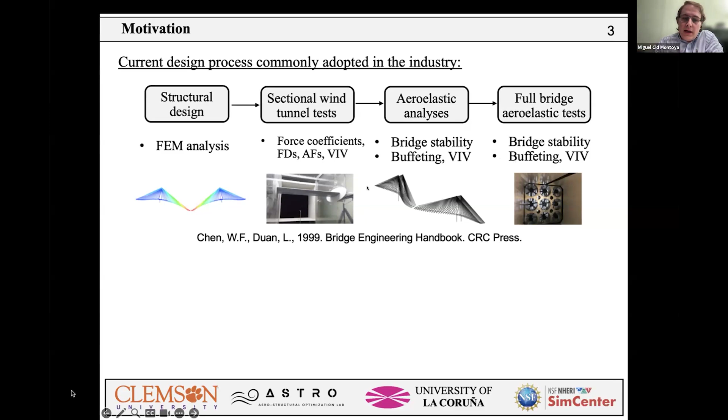The problem with this is that if they want to iterate and optimize the process, it's kind of complicated because we have two different teams. We are relying on experimental approaches, and consequently the chances to iterate are complicated.

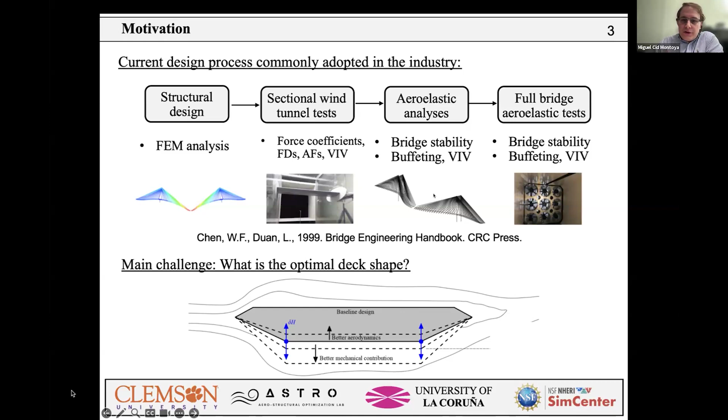And there is one main challenge here. What is the optimal deck shape? How can we optimize the cross section so we can reduce the cost, the use of material, and also increase the safety and resilience of the structure? So in order to answer that question, me and my collaborators have been working on developing frameworks to address this question, by taking advantage of CFD simulations.

But in order to do this, first we need to develop a parameterized finite element model. So every time we change the geometry of the bridge, we see how that affects the natural frequencies, mode shapes, and so on. We need to define the wind modeling, which is, of course, given by the location of the bridge. What are the design variables that we are going to be modifying along the design process?

That may include the definition of the towers, the cable supporting system, the cross-section, and everything that we want to modify. And also, in order to see how shape modifications affect the bridge aerodynamics, we need an aerodynamic surrogate model that provides us with all the aerodynamic information we need to carry out the analysis, right?

So let's say that we are going to look at the buffeting analysis. In that case, we will need flutter derivatives, admittance functions, and so on. And if we use the quasi-steady assumptions, we can just go ahead and do the optimization with an aerodynamic surrogate model that is trained with force coefficients and the slopes.

But this has some limitations. For instance, here in this figure, we see the cross-section of the Great Belt Bridge, which is considered a streamlined cross-section in which the quasi-steady theory more or less behaves properly. We can see that the flutter derivatives as a function of the reduced velocity, plotted using the Polytechnic of Milan formulation, are more or less horizontal, meaning that they are not very sensitive to the effect of the frequency.

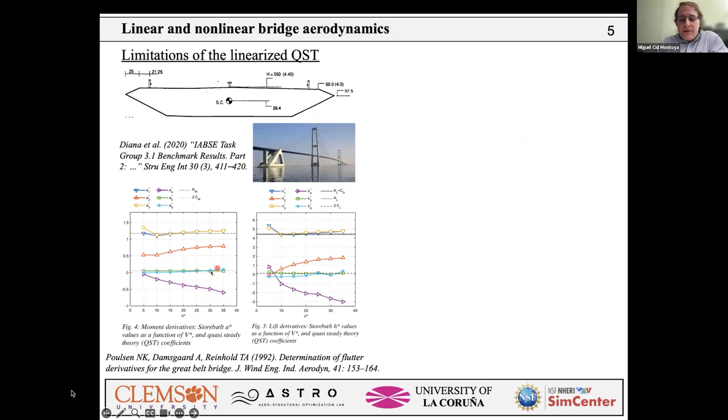However, if we move to more advanced geometry, such as the design of the Messina Bridge, we can see that even though at high reduced velocities they asymptotically tend to the quasi-steady state, and here we can see that these lines are more or less horizontal, at low reduced velocity we have a number of nonlinearities, right? So the quasi-steady formulation is not going to work for this range of reduced velocities.

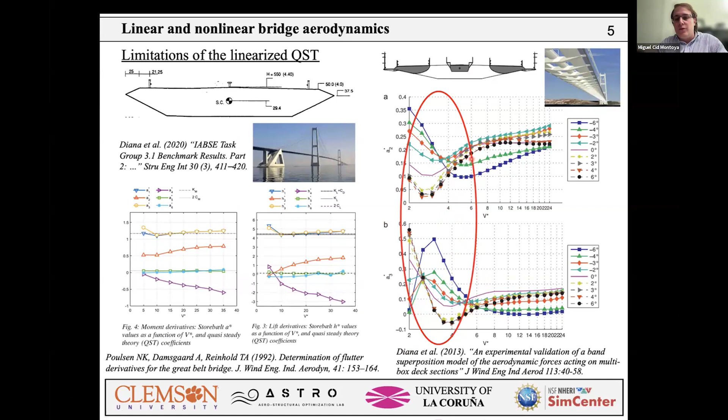This means that adopting the quasi-steady theory has some limitations, and we need to advance the CFD simulations and emulation strategies to carry out the design of the bridge using this approach.

In all the aerostructural optimizations we carried out, we saw that the main trend the design follows is to increase the depth of the deck. This is because, particularly when we have a box deck cross-section, increasing the depth improves the mechanical properties: torsional stiffness, bending stiffness, and others. The torsional stiffness is especially positive for improving aeroelastic responses, flutter response, and buffeting response.

But as we increase the depth, we increase the bluffness. For streamlined geometries, the quasi-steady formulation works well, giving a good estimation of the response. But as we increase the depth, we move to bluff geometries where the quasi-steady theory doesn't work. That's another reason for getting rid of the quasi-steady theory approximations.

The original aerodynamic surrogate model, based on force coefficients, standard slope, and the quasi-steady theory, works like this: we have a baseline geometry, we define the design variables we're going to modify, we define a sampling plan based on those variations, and we carry out CFD simulations where we are not moving the deck. We call this static, because the deck is not moving. We build the surrogate, and then use the quasi-steady theory to estimate the flutter derivatives.

By doing that, we can carry out the optimization. If the design is streamlined, the quasi-steady theory works well and we get accurate results. But if it's not, we get bad accuracy.

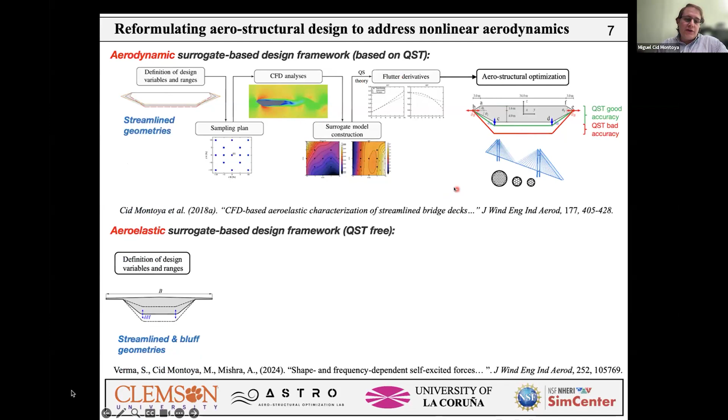So we've advanced this by using dynamic CFD simulations instead of only static ones. We are doing forced vibration, extracting the dependency of the fluid structure interaction parameters with the reduced velocity, so now we are considering both streamlined and bluff geometries. In our sampling plan we have the deck shape, but also aeroelastic parameters such as the reduced velocity, and a new word we are working with, the angle of attack.

Our simulations are no longer static, they are dynamic. We are reproducing the forced vibration typically conducted in wind tunnel tests, and by doing that we can create an aeroelastic emulator that captures the nonlinearities. So if we need to carry out the design and deal with bluff geometries, as long as the CFD simulations are accurate, we are able to reproduce the bridge response.

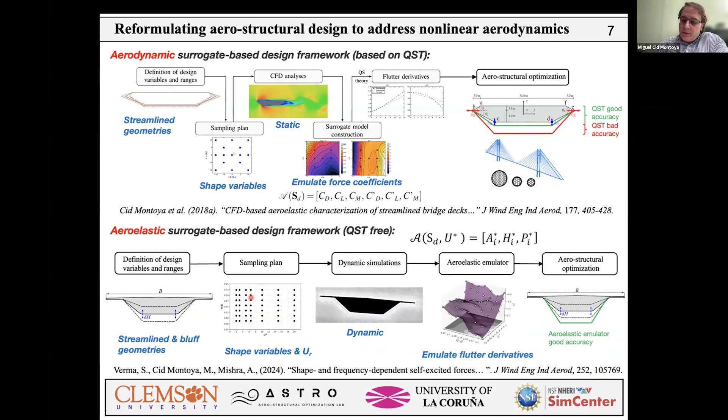We've applied this to the cross-section of the Sunshine Skyway Bridge as a representative single box deck geometry, because there is a lot of research on this cross-section in the literature. The first studies were conducted at Western University, but then several universities in Italy carried out numerical and experimental investigations to study the effects of geometrical parameters, such as the level of roundness of the corners. Thanks to that rich literature, we can use those results to validate our CFD simulations.

We use this baseline geometry, which is the actual geometry of the bridge. The actual geometry has sharp corners here, but we are considering the rounded configuration because it has more results in the literature. We modify the depth by increasing and decreasing this vertical distance, giving us a representation of a design domain with a strong impact on the mechanical properties, but also on the aerodynamic responses of the bridge.

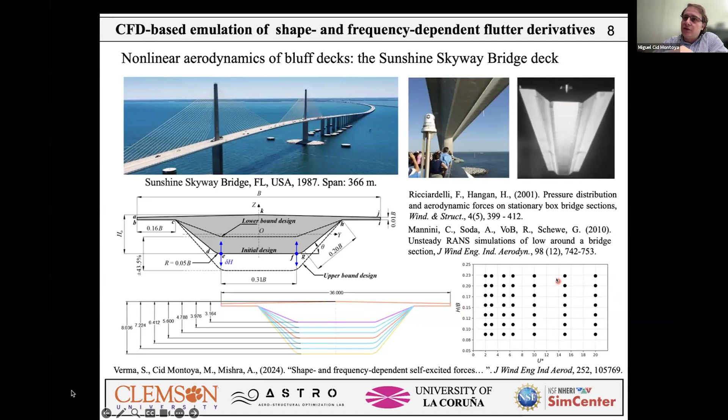This is the sampling plan we carry out, and these are the geometries we are considering. This is H, the depth, this is B, the width, and this is the reduced velocity we are analyzing. We have a higher density of samples in the lower range of reduced velocities to capture nonlinearities, and a lower density where we consider the tendency converges asymptotically to the quasi-steady state.

In terms of the simulations, we impose a forced vibration. We carry out forced vibration in three degrees of freedom to extract the 18 flutter derivatives. We obtain the flow fields, extract the pressure distributions, then extract the self-excited forces time series, and from there obtain the flutter derivatives.

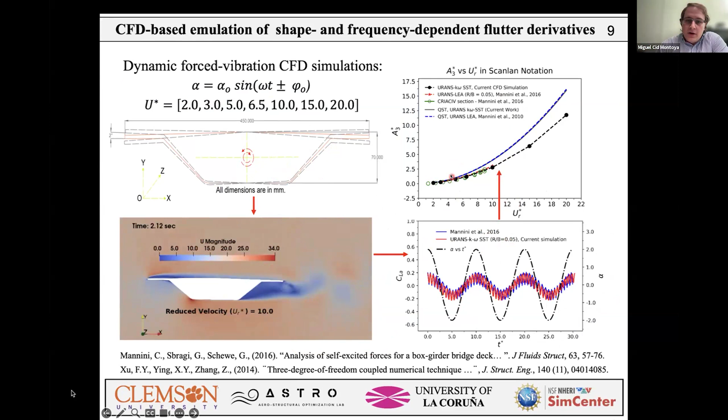Before that, here is a description of the mesh. In this case, we took care to have a lot of density in the wake, because this is a bluff geometry. The mesh was generated by a Python code that is fully parameterized, so every time we modify the shape, it adapts and produces a new mesh.

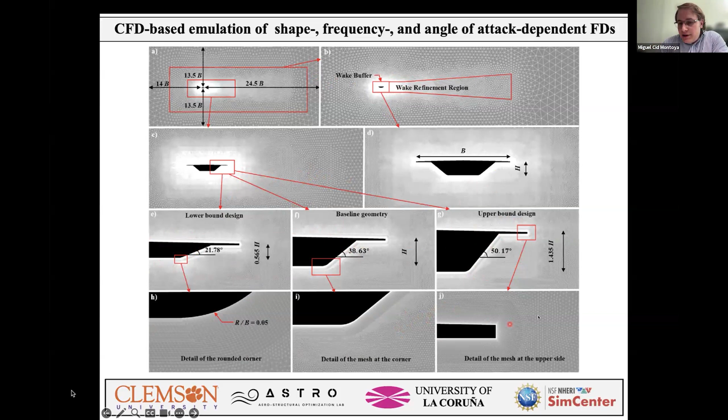Here we have examples of one of the most streamlined geometries, the baseline geometry, and the bluff geometry. We also took care to have a smooth transition from the boundary layer to the bluff regions.

With this mesh, we built several meshes, coarse, medium, and fine, considering the general distribution of cells, but also the number of elements considered along the boundary layer. We carried out verification studies in order to ascertain the independency of the spatial discretization, but also the time discretization, both for static and dynamic simulations, in order to see that our results are independent of the modeling schemes. We carry out a lot of validation studies.

Here on the top right, we see the comparison with the experiments reported by Mannini et al. 2016 that were conducted at the University of Florence. These are the flutter derivatives A2, H2, A3, H3.

Here we are comparing the results with the experimental tests conducted by them, and numerical simulations conducted by them using a different turbulence model, and the quasi-steady approximation, where we can see that results clearly diverge from those obtained by the quasi-steady formulation, which justifies the approach that we are using.

Here in this figure at the bottom, we see a comparison of the streamlines reported by Mannini 2016 with our flow fields, showing that we are basically reproducing exactly the same flow fields.

And here we have the time series in which we can see that even though there are slight variations of the intensity of the vortex shedding and the frequency, the amplitude of the response and the phase is basically the same, which is the one that controls the results in terms of flutter derivatives.

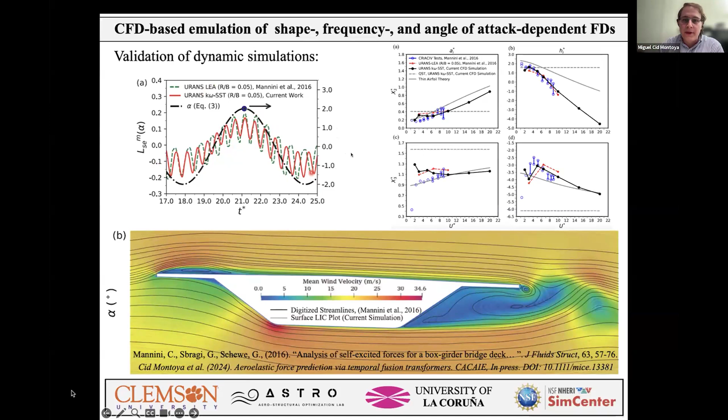Running these simulations for all the samples in the sampling plan, all the geometries considered and the frequency, we can obtain this data set of flutter derivatives.

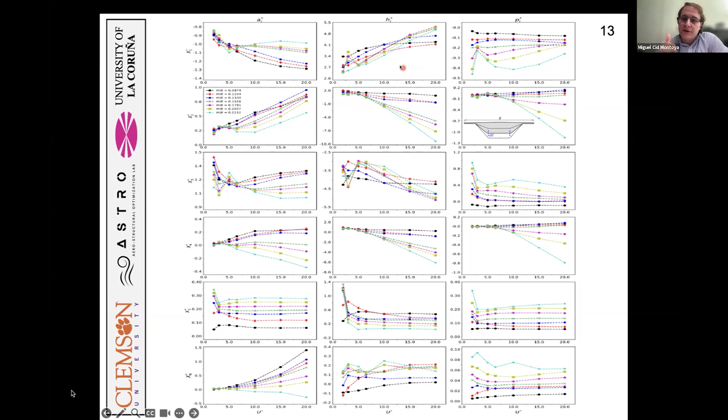We can see that when we have streamlined geometries, the most streamlined geometry is the one represented in black. These results tend to be horizontal, frequency independent, but as we increase the level of bluffness, they are more dependent on the value of the frequency, and their convergence to the asymptotic behavior is delayed to higher reduced velocities.

By using this information, we can build a surrogate model. So basically at the low reduced velocities, we have the model vibrating at high frequencies. As we increase the reduced velocity, we change the frequency, and we also modify the shape. So the simulator is supposed to reproduce all these effects during the analysis and the design process.

Here we have some surfaces of the result using the Scanlan notation, the PoliMi notation, which allow us to see the horizontal convergence to the asymptotic response. And we can see that this application case, as it is a bluff geometry, it has a lot of nonlinearities.

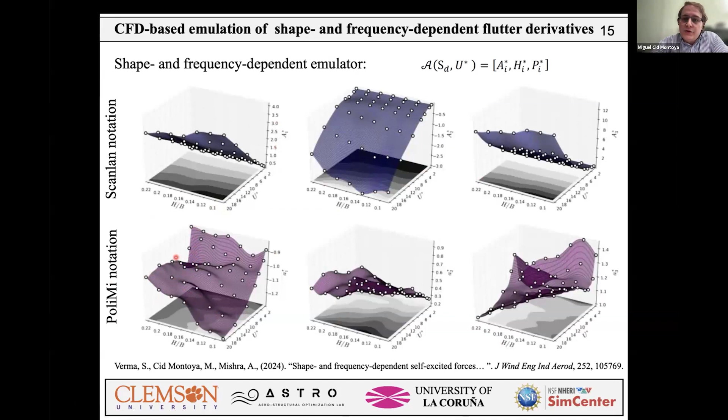And here is where it comes the question of how we should do the interpolation between the points. The thing is, if we take a look at the flutter derivatives, there are strong changes between the points that we have obtained with the CFD simulations. For instance, taking a look at the blue line here, we can see that we are capturing some nonlinearities here, but we don't know exactly what is going on between this point and that point.

So the ability of the surrogate model to reproduce that response is based on the sampling density. That means that the approximation that we use, the kind of approximation that we use, is going to condition a lot of the analysis and the design.

For instance, here, this is a graph that I took from this paper, Salvatori and Borri 2007, and they were discussing the different interpolation approaches that you can use when you have this experimental data, these black points here, and what happens if you use a linear approximation, a spline interpolation, or a rational function, another kind of approximation in the time domain. And just taking a look at what happened at different reduced velocities, we can see that the value can change by 20%. And of course, that affects the bridge response and consequently the optimum design.

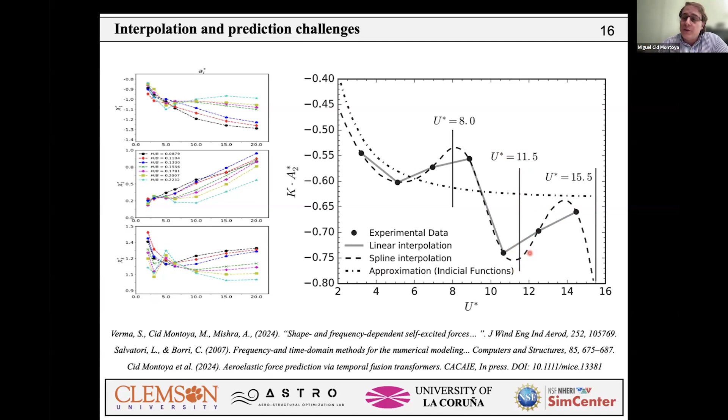So the key question, or the thing that we want to address here, is what information should we use from the CFD simulations, and how deep we can go, or what kind of rich information we can use to improve our interpolation capabilities. So the basic problem we are looking at is we have the design of a bridge.

We are focusing on the deck shape because that's what impacts the aeroelastic response of the bridge. We carry out a sampling plan, and for every design in the sampling plan, we carry out the forced vibration CFD simulations. We extract the flow fields. From the flow fields, we extract the pressure distribution.

From the pressure distributions, once we integrate those, we get the force time series, then we extract the flutter derivatives, and we obtain the bridge response.

How do we go from the design to the response to carry out a good design? Our first approach will be to build a huge surrogate in which we have as input all shape and size bridge design variables, and we get as output the aeroelastic response. But we will, of course, have dimensionality issues.

The approach I've been describing so far is to go from the sampling plan to the flutter derivatives, and we just build a basic surrogate model that reproduces the integrated fluid-structure interaction parameters. But we can go deeper: we can take a look at the force time series, and that is going to help improve the accuracy.

So for instance, in this work that we recently published, we carry out the interpolation in the time domain. The thing we were interpolating were the force time series instead of the flutter derivatives. So we do the interpolation first, and then we extract the flutter derivatives.

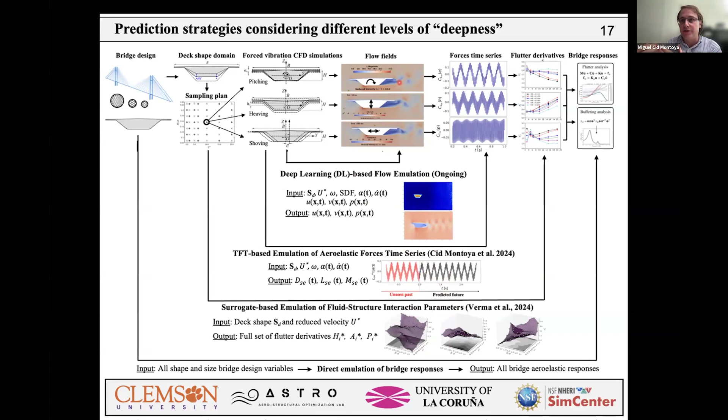But we can go even deeper. We can try to reproduce or emulate the flow, and from the flow we extract the pressure distribution, the force time series, and then the flutter derivatives.

This is the approach we use for doing the emulation of the time series, in which we use temporal fusion transformers to do that. A temporal fusion transformer is an AI technique that was recently developed in 2021.

What we do basically is carry out the CFD simulation, for example, obtain the time series, and train this model with a lot of time series to see if we can predict the time series of another geometry or reduced frequency that is not in the original sampling plan.

We did that by using the original sampling plan and removing half of the samples, which is very demanding for an AI approach that typically uses a training-test split of 70-80%.

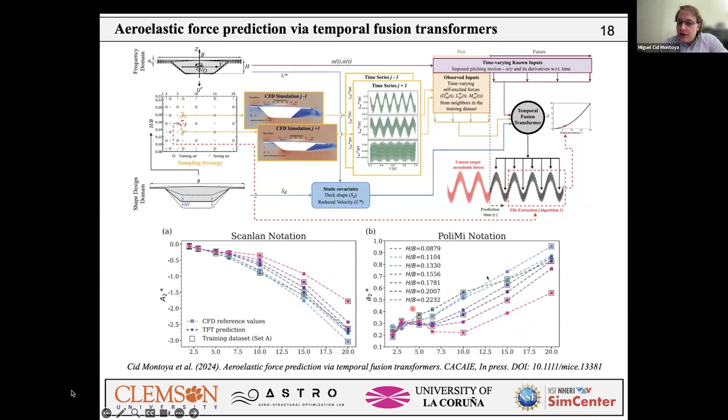We can see that the model, after training, perfectly reproduces the flutter derivatives, even the points that are not in the sampling plan. For instance, here the ones with a square were used during training of the TFT, and the ones without a square, like this point here, were predicted.

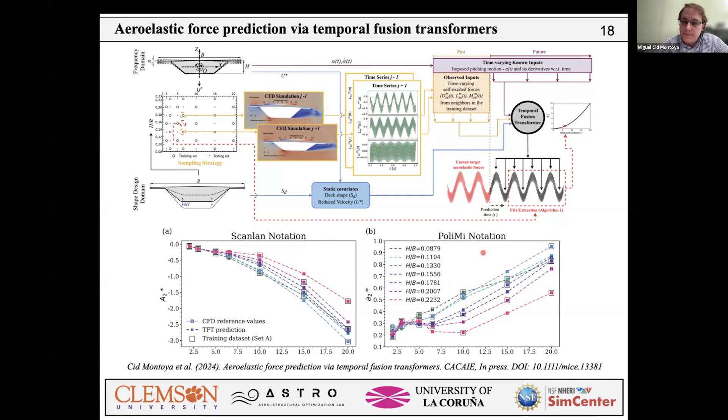Since we are doing the prediction in the time domain, the chances that it's not going to work, as can happen with a Kriging surrogate, are very reduced, and the emulation strategy is more robust. The reason I am presenting this database is because we want to get deeper and look at the flow fields to improve the prediction strategies.

So what we have in this database is the sampling plan: 6 reduced velocities, 7 geometries. Here this is the geometry where we are changing the depth - these are the 7 designs. In terms of the reduced velocity, this is the frequency of oscillation.

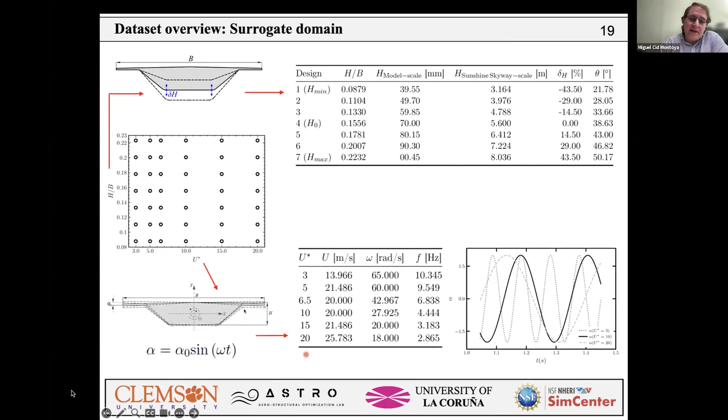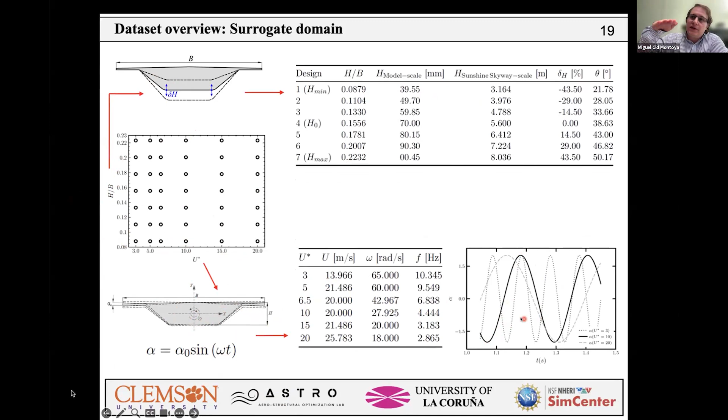We are looking only at the pitching vibration because in order to extract the flutter derivatives, we need the 3 degrees of freedom: torsional, vertical, and horizontal. We are only adding the torsional response to the database because of storage size. By changing the frequency of oscillation, we change alpha, the leading rotation of the deck.

This is the data we are collecting: first, the flutter derivatives. Then we are also collecting the forces, the time series of the forces. We are also collecting the pressure distributions along the deck, so they can be used for training AI models. And we are also collecting the fields.

Since we are talking about 7x6 simulations, the fields are about 30 terabytes, compressed about 8.7 terabytes. This other data, which is of course smaller, is in the range of 30 gigabytes, and this is basically nothing.

Here we have some images of the dataset. This is the force time series. When we keep the geometry and change the reduced frequency, this is what happens - the frequency of alpha is changing and the behavior is changing.

Here we have how it looks when we change the geometry and keep the frequency constant. We can see the frequency of oscillations is the same, but the response is changing. We can see here we don't have vortex shedding because this is similar to a flat plate, so the response is controlled by the forced oscillation. But as we increase the bluffness, the vortex shedding is what leads the response.

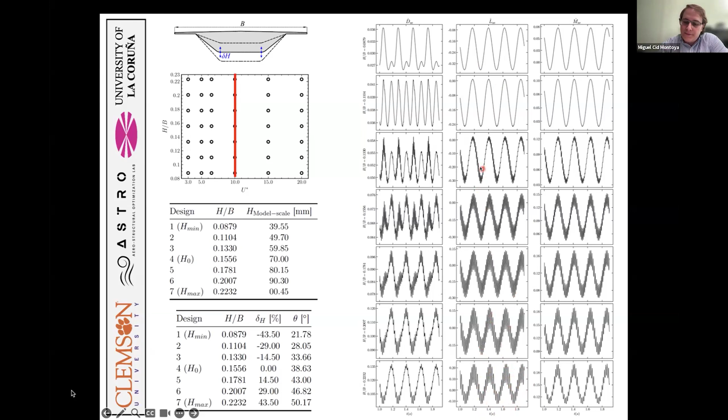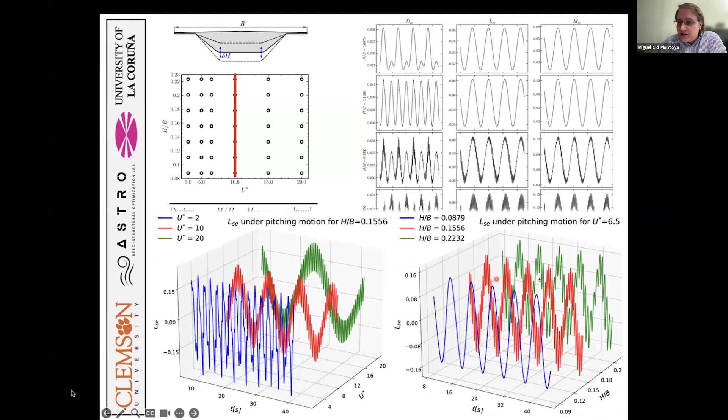If we compare this in the two planes, how changing the reduced frequency or the geometry affects things, we can see these characteristics are very clear. Moving to the pressure distributions, we have the pressure distributions for all the geometries, obtained as a function of time.

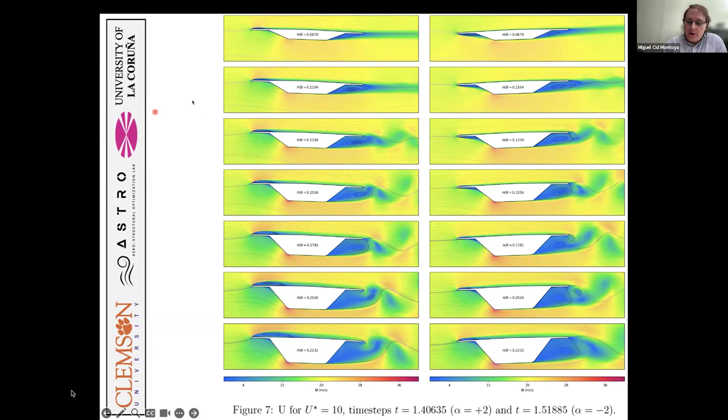We also have the flow field of the pressures all around the domain. We have the turbulence kinetic energy, which is very good for seeing the turbulence, and all these features are very clear in this figure.

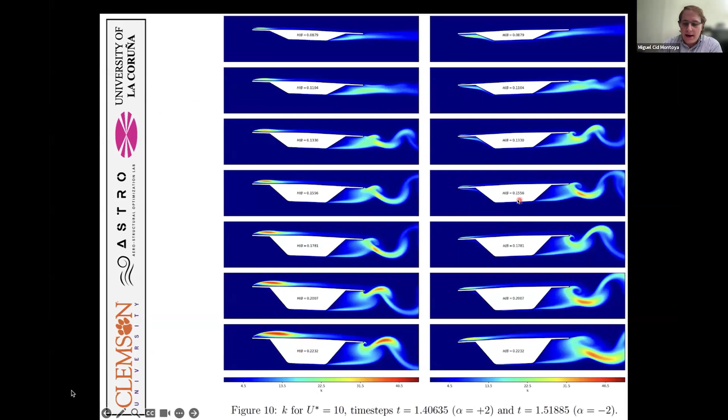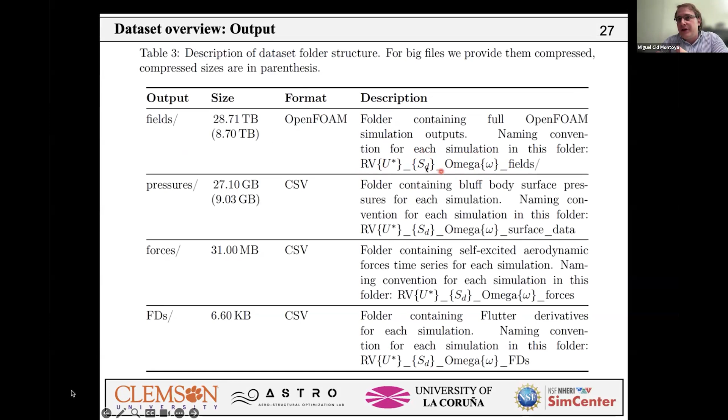That's most of the information we have in the database. So again, we have the flutter derivatives, force time series, pressures, and flow fields. The format of this data is as shown in this description. We have the reduced velocity in the name, then the shape identification, the frequency of vibration, and the name of the field. There is one file for each geometry and each pair of geometry and reduced velocity.

Inside those files, for the flutter derivatives, the format is going to be CSV. For the self-excited forces time series, we have the time and then the 3 components: drag, lift, and moment. For the pressure distribution, we have the time and the location in terms of X and Y, since it follows different points along the surface of the deck.

For the flow fields, we are using the same format used by OpenFOAM, since everybody is familiar with it. We are sharing all the output obtained using the Menter's K-omega SST turbulence model. Another important thing is that we are storing a very detailed time discretization—saving every time step at 0.000225 seconds to have rich information in time, which is critical for training the machine learning models.

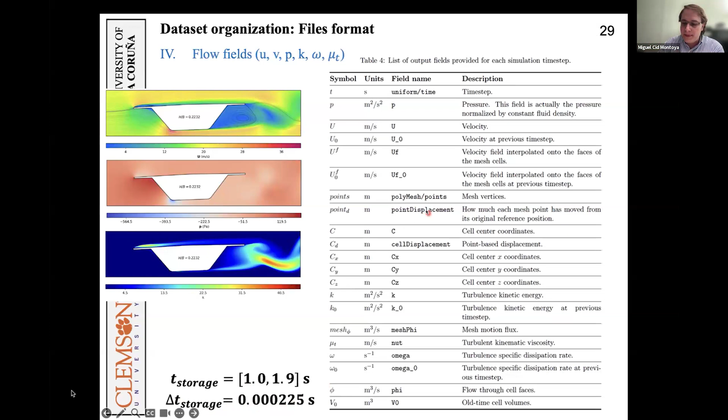So just a couple of applications, very quick.

Miguel, I'm sorry to interrupt, but you're about 4 minutes over your time slot already. Sure, okay, no problem.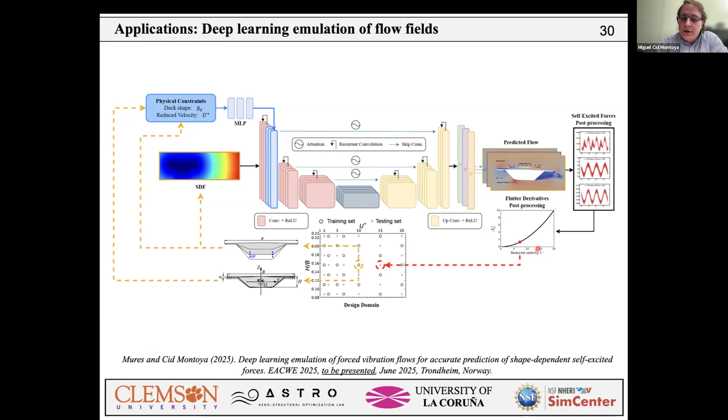So here we have a couple of applications. The basic idea is that we are going to use this for training machine learning models, and we will present in Norway in a couple of months. So I'm going to skip this.

In conclusion, depending on the modeling strategy, we need to use different CFD simulations. The goal of this work is to share this database of flow fields, pressure distribution, and so on, so the wind engineering community can develop models and advance in the wind-resistant design of bridges.

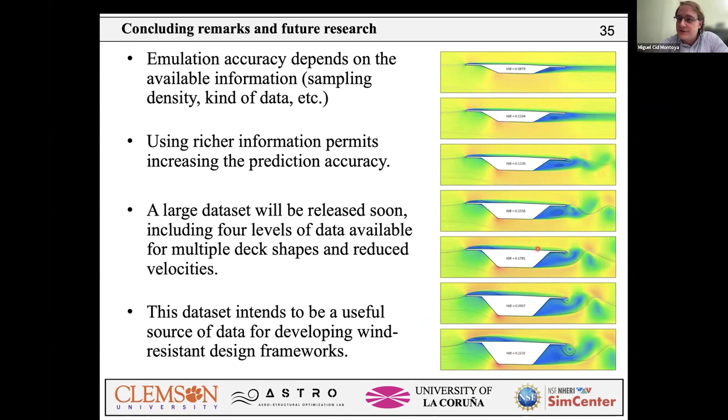Thank you so much, and sorry for the timing.

No worries. Thank you so much, Miguel. I don't see any questions right now in the chat, but I do want to encourage everyone to post questions. I have a few, but I'm going to hold these for our discussion period at the end so we can stay on schedule until then.

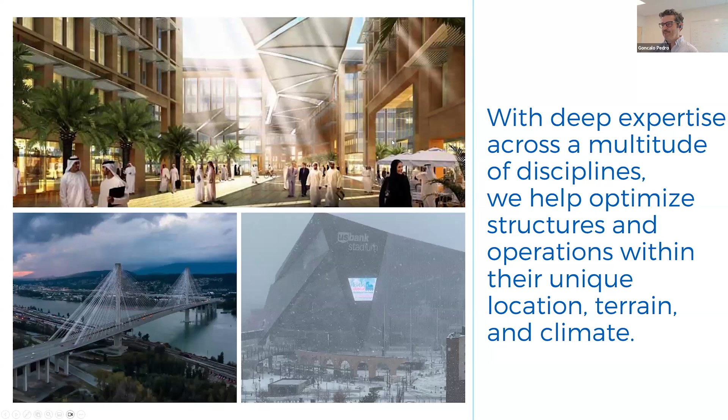But why do we care about computational wind engineering? Well, for a lot of reasons. One is safety. We all know that whether you're looking at wind comfort and pedestrian level wind, or structural engineering on buildings, or even bridge design, all these things have a safety component we have to be aware of. The other thing is cost. A lot of these things we're trying to optimize, keeping safety paramount and front of mind, but obviously our clients want to optimize in terms of cost so they can build more efficiently. The other thing is we're engineers and we love to build cool stuff. Ultimately that drives a lot of the development we undertake.

I'm going to focus a little bit on carbon reduction, because our clients obviously want to make their projects more efficient. They want to build more efficiently. They want to reduce waste. But the way I see it, if we flip it on its head, there's a really good opportunity. It's a win-win type of proposal with regards to carbon reduction.

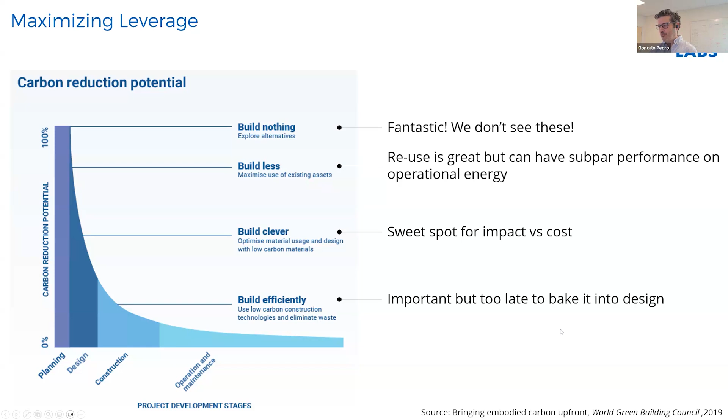We are already into construction. If you look at it in terms of budgets, the reality is that the construction budget is where you build the actual thing, that's where all your money is being sucked up. But really, when we look at an accessible budget from a design perspective, it's very early on - concept design, schematic design, and maybe a bit into detail design. This puts a bit of a quandary for us, where we have these limited budgets, but this is actually where we want to leverage all that analysis, because that's going to have the biggest bang for the buck. So really, the cost to modify goes up over time, and the cost influence goes down as you go along the project timeline.

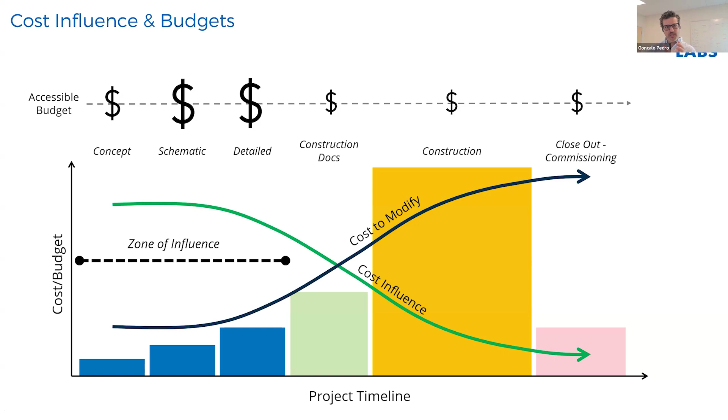So that's the zone of influence that we want to be in. So all our tools that we have to develop have to be focused on that zone of influence.

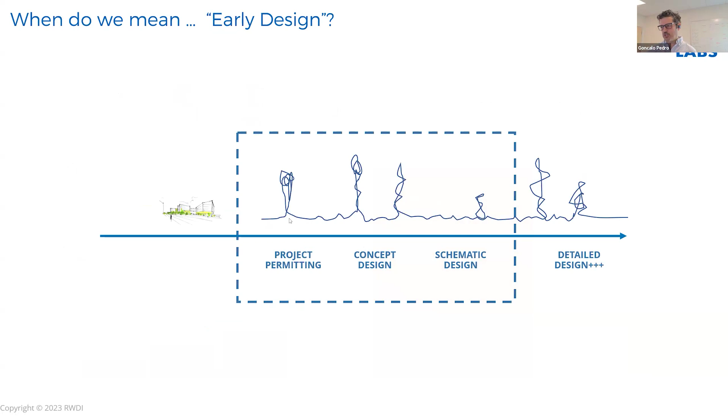When you look at early design, the project will evolve over time. There's a lot of competing interests, competing pressures, and we get a lot of questions from architects, clients, and structural engineers. Sometimes we can answer them quickly with a review from an expert, but a lot of the times we actually have to do some analysis ourselves.

I'm just going to quickly go through this. I want to note that we operate in a very different space to, say, a car manufacturer.

If you think about a car manufacturer, they'll put about $1 billion of R&D into a single vehicle design, and they'll study that design to death, putting so much effort into it. Then they sell this product worth nominally $20,000 to $100,000, but they sell millions of them and make billions off this single design.

In architecture, engineering, and construction, we're doing all this effort for a single building. Our buildings are in heterogeneous landscapes, they're all different, and we have to do it at a really low cost. So the amount of money that goes into R&D relative to an automotive manufacturer is really quite small.

So this is the challenge that we have. I won't dwell on this slide, but I think it's just to note that now we have all these different tools at our disposal. It's kind of confusing, especially for a client, but from an expert perspective, it's really important to leverage these things at different points in the project cycle, and each of them have advantages and disadvantages.

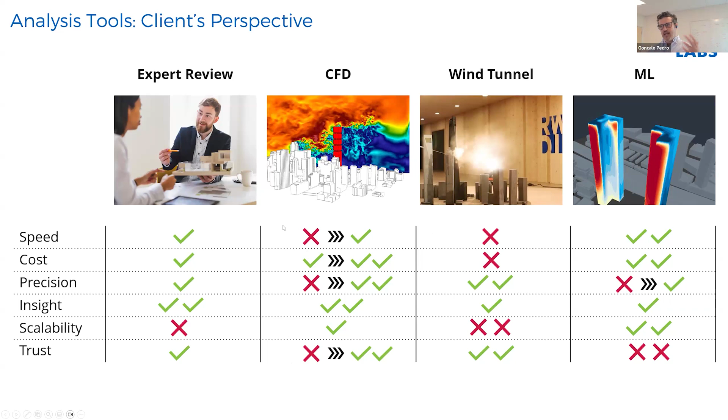The wind tunnel is still there. It's still a really important piece of equipment that we use daily to look at projects, and I don't think it's going to go away anytime soon. But I think we are seeing more and more computational fluid dynamics and even machine learning pick up some of the slack, especially on the early design side, and it's starting to push into later design as these tools get more evolved and we have more confidence in them.

I'll touch upon the two topics that I think are most relevant, which is cladding and structural. Cladding is an analysis of the pressure forces on the building facade to understand if these cladding elements, which can be fins, windows, or paving stones, are actually going to pop off in a higher wind event. What we want to do is identify early on any key issues that have to do with the actual aerodynamics of the building.

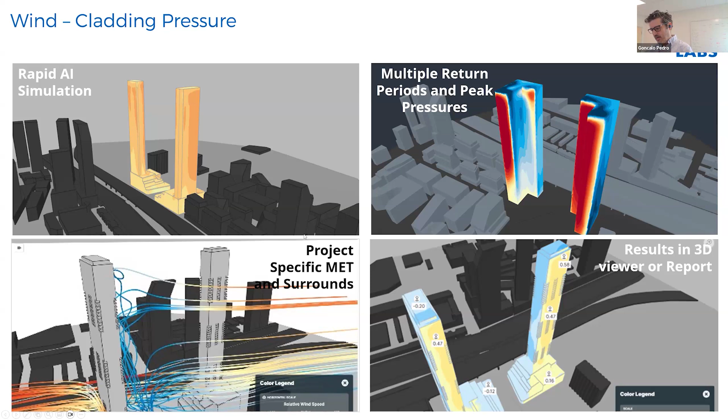So what we did is we actually created a couple of tools to go at it. One of them, maybe the marquee tool, is an AI solver trained with our wind tunnel data - we put in about over 600 projects to train the solver. The nice thing is you can put in arbitrary geometry, not only for the buildings themselves but also for the surrounds, and then simulate the pressures on the buildings for a variety of directions. This really allows cladding engineers to identify hotspots, identify potential challenges, maybe modify the aerodynamics of the building, and ultimately gives them a heads up that they could have these challenges down the line.

Just a little bit on our actual cladding estimator. Again, we used wind tunnel projects, and it gives us directional pressure, which we then combine with climate data to get a bit more of a quantitative analysis of the pressures on the building facade.

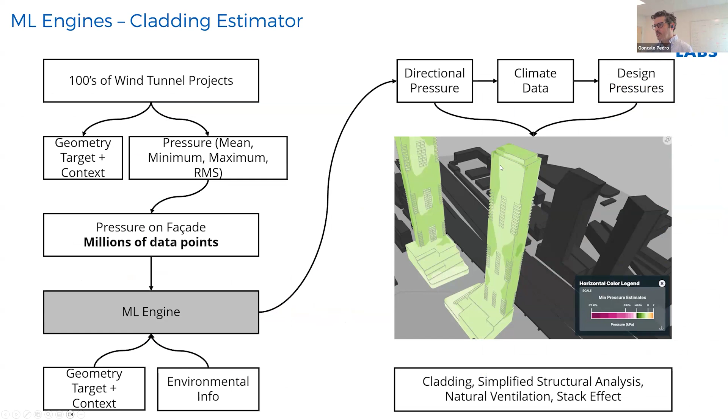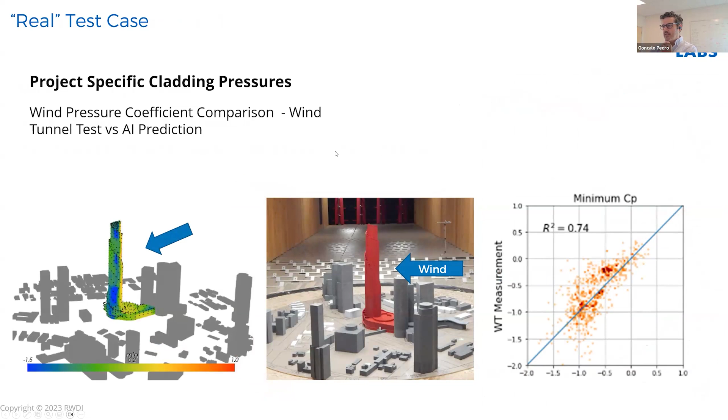A couple of spots here and there where maybe it's not as accurate as the wind tunnel, but generally speaking, quite happy, even on the minimum and maximum pressures, which are typically harder to hit than the means. This allows us to apply it to more complex buildings, which we've tested against quite a few. For early design, this is a really good tool because it literally runs in seconds, so it's a great way to quickly iterate through a variety of designs and do some rapid fire testing.

This is a tower design that we worked on for Gensler. We were able to go through not only machine learning but even CFD, taking it further to do some quantitative analysis beyond the ML. CFD allowed us to really rapidly test a variety of tower shapes.

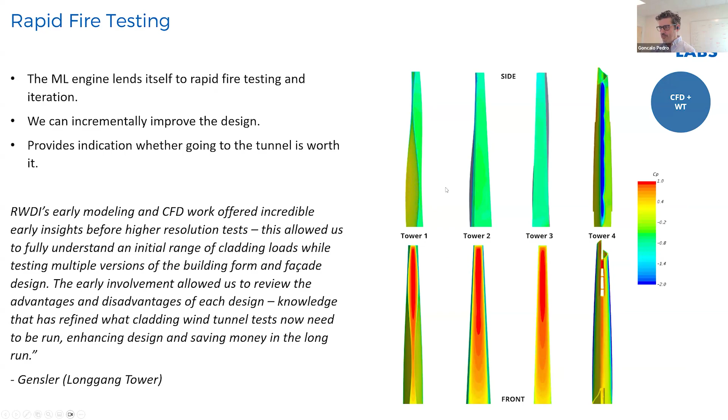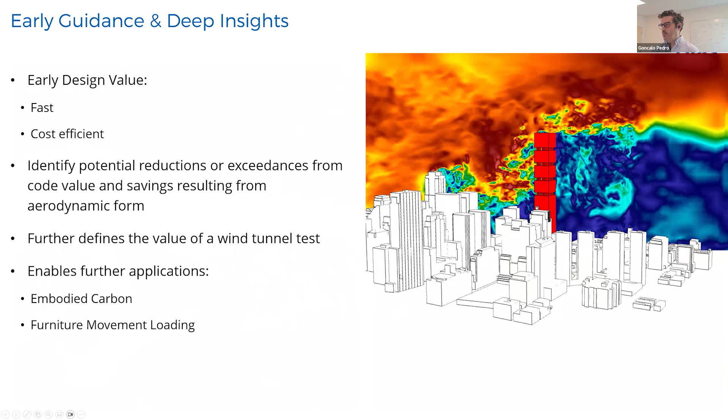When we look at structural, pretty much the same picture arises, really trying to combine these computational tools early on so that we don't get surprised in the tunnel or in later stage evaluations. In this particular case, CFD, especially large eddy simulation, is our go-to tool even in the early stages, because we avoid RANS due to its limitations, especially on crosswind cases. But LES has shown itself to be an excellent tool to analyze these kinds of buildings.

This is an example of validation we did, for 36 wind directions, LES CFD again on that CAARC building. But in this case we actually added in some resonance, so the structural properties of the building made up for the CAARC building. The blue is the wind tunnel testing and the red is the LES, and it does a really good job of tracking the wind tunnel results. We've tested this on more complex cases, and it pretty much follows that you're able to track and do as good a job as the wind tunnel.

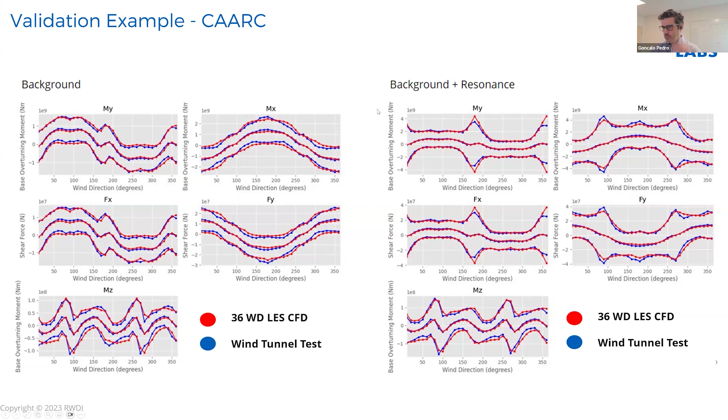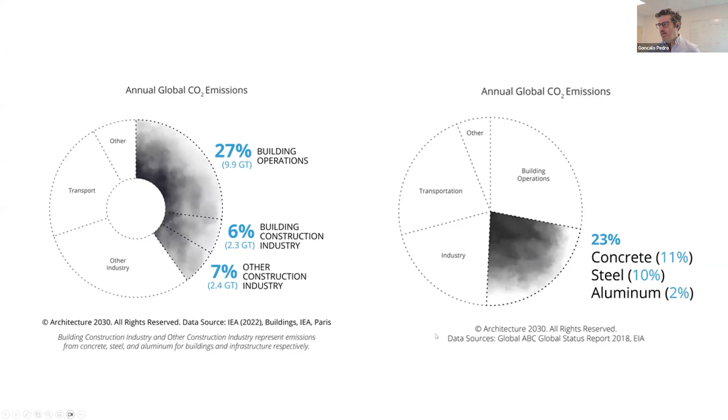So let's go back to the big picture to close out. If you look at the annual global CO2 emissions, the construction industry is really a non-trivial part of that, something like 23% of annual global CO2 emissions. There's a big chunk in building operations, that's more the sustainability side, but we're talking about a really large chunk we can work on. If you look at a building, especially these days, whereas in the past operational costs were very high, operational carbon was really the dominant feature.

Over the building's lifetime, the amount of carbon associated with heating and operating the building was quite high relative to the embodied carbon. Nowadays it's actually starting to flip. We've gotten really good at reducing the carbon footprint of the operational side of things, but now we have to start looking at the embodied carbon. This is where having that analysis early on to shave and reduce the structural stiffness and potentially structural weight of the building, reducing the amount of steel and concrete we're using, has a very large impact.

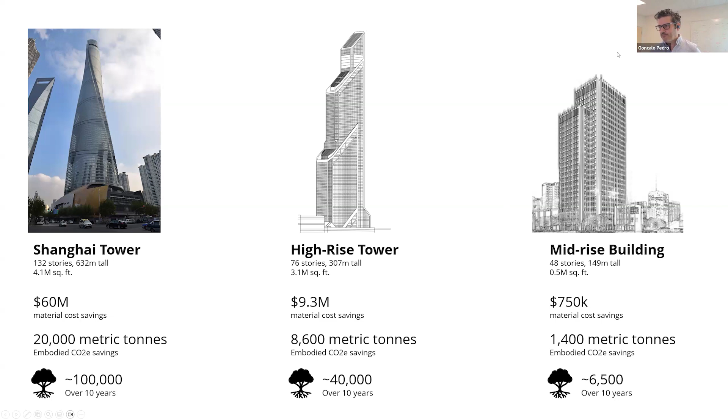I just want to finish off that one of the things we talk about at RWDI is really trying to maximize our handprint - our work in trying to reduce the embodied carbon - while minimizing our footprint. We can always do better at minimizing our footprint, but we're getting there. That's really the whole goal with what we do, to keep planetary health in mind as we're doing this work. And that is it for me.

Great, thank you very much. This is very interesting to see the industry perspective.

We are running a little bit late, but I want to take time for one or two questions. There's one in the chat: academically, CFD or wind tunnel simulations can face challenges in acceptance compared to traditional experiments. How steeply does professional resistance increase when your firm proposes use of not just CFD but machine learning in real projects? I guess you could train them on wind tunnel or CFD simulations.

So you're right, I think the professional resistance is more on the engineering side. Architects love it, as long as you cover them from a liability perspective, they don't mind.

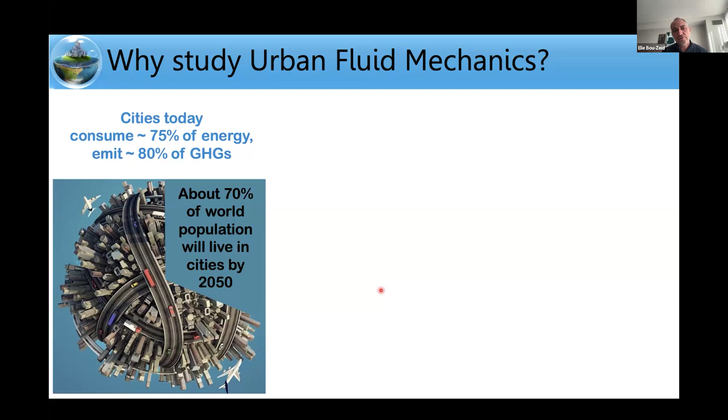Cities are extremely important, and we have to study their fluid mechanics because 70% of the world population will live in cities by 2050. So when we talk about mitigation of climate change and adaptation to climate change, it's really an urban problem. Today already cities use a disproportionate amount of our energy and emit a disproportionate amount of our greenhouse gases. About 55% of the world population today live in cities, but they consume much more than 55%. So in a way, cities are where the grand challenges of the future will be overcome to trace a sustainable future, or maybe not. And we end up with maybe not the future we all hope for.

But you're also interested in other patterns. You're interested in the horseshoe vortex at the street level, in the TKE production in the wake, and potentially also, for example, when you have a hot facet or roof, what kind of thermals and buoyant turbulence is going to emanate from that facet.

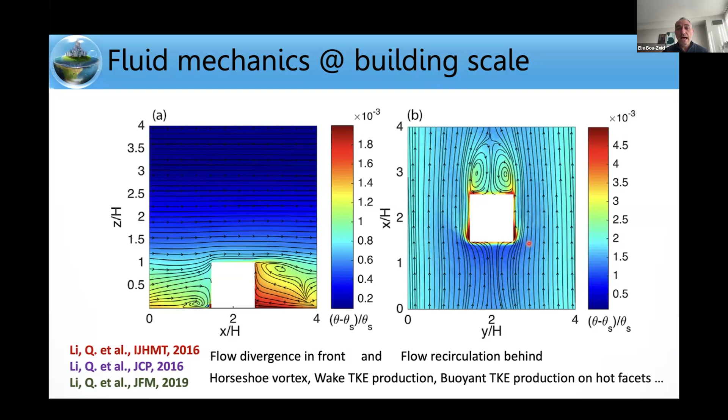You can also think about urban fluid mechanics at the whole city scale. This is another study that we have done, where we basically had a city that's hotter than the surroundings, which is very typical. That's what we call the urban heat island. Cities can be up to 10 degrees hotter than their surroundings.

However, with a little bit of wind, you break this recirculation bubble and you basically get more into an advection scenario, where the wind is able to advect heat and pollutants away from the city, of course, to the suburbs. So the suburban people will be affected, but at least in the city, you will not have this accumulation. So in this case, we were studying circulation and flow at the city scale.

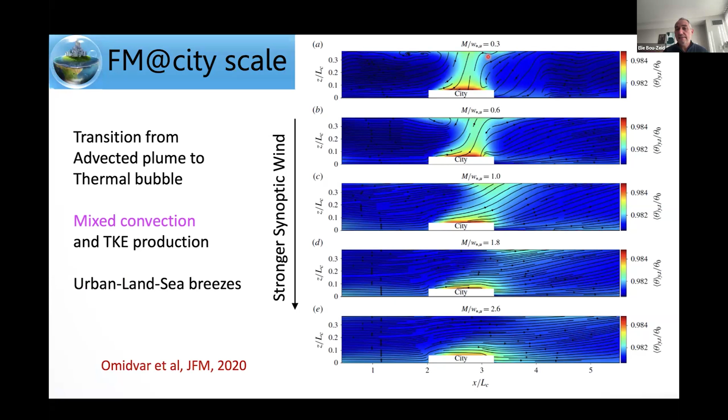There we are interested in the sort of mixed convection you get, where you have both forced and buoyant or natural convection happening, the TKE you might get, and whether, for example in this regime, aerosols from the city can form clouds and alter urban precipitation and so on. You might also, for coastal cities, be very interested in the complex urban land-sea breezes that might emanate. However, today I'm mostly going to focus on the intermediate scale, which is basically the neighborhood scale, where you're not looking at the whole city or a single building, but at a cluster of buildings.

We've known for a while that under these cases, we can conceptually classify the organization and density of buildings into three regimes. If the buildings are very far from each other, we get the isolated roughness flow, where each building acts or interacts with the flow as if it were on its own. The wake from the first building doesn't really affect the second, which is why we call them isolated.

As buildings start getting closer to each other, the wake of the windward building will affect or interact with the leeward building, creating this interactive regime, or what we call the wake interference regime.

As buildings get very close to each other, we get the skimming flow, where the flow comes in and the buildings are so close there's hardly any mixing. There's a recirculation region that would obviously trap pollutants and heat inside the canyon.

When the buildings get very tall, you can even have two recirculation regimes, one with the flow and one counter-recirculating zone. Again, these would trap pollutants or reduce the ventilation of the canyon.

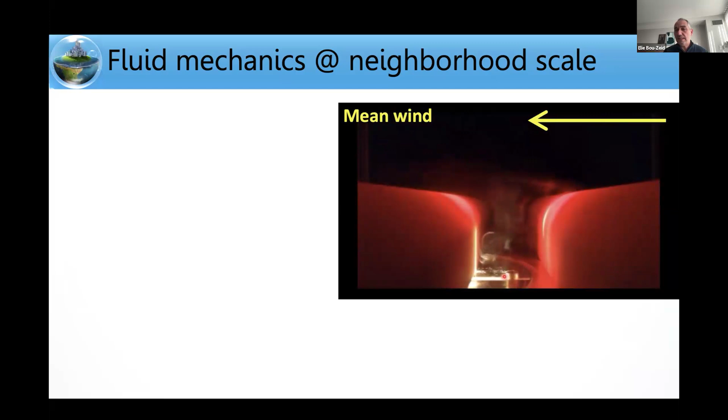Maider Llaguno, my ex-postdoc, made this in a wind tunnel, where the video starts with flat roofs, and as you see here, you don't get a lot of ventilation. Then it moves to a basically angled roof where you see more ventilation, and then a round roof where you also see a lot of ventilation.

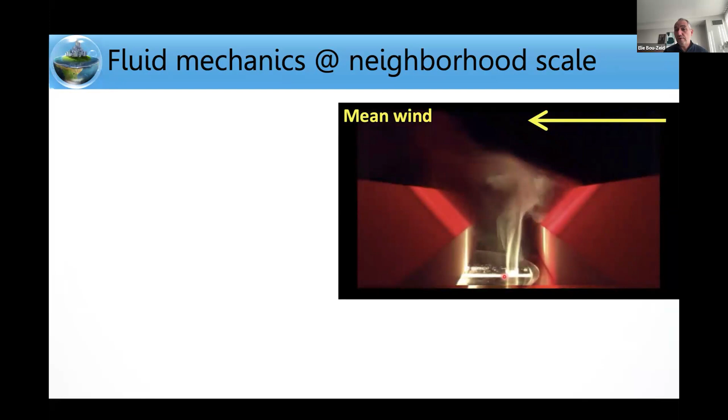So you might be interested in how roof shapes at the neighborhood scale affect ventilation.

Another thing that's very important at the neighborhood scale that I'm going to focus on today is basically zones in the city where you might have very strong winds and very weak winds.

In this case, I'm plotting the maximum wind speed that we observe in a large eddy simulation. You see, for example, in red, there's a very gusty zone, and in blue, as I'll explain in a minute, we get some stagnation zones.

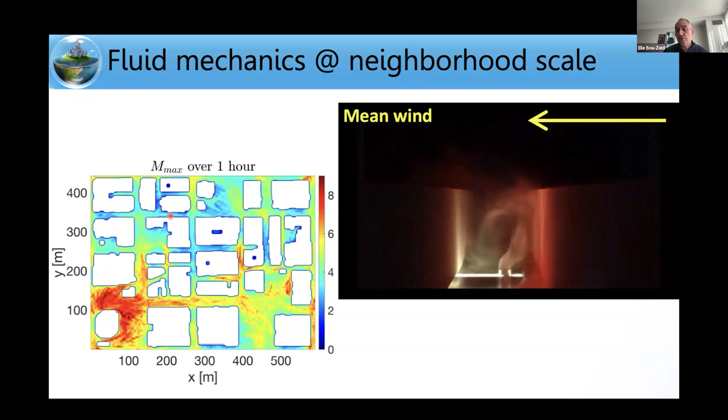So you're interested in basically where in the city you might have pedestrian discomfort or safety problems because of extreme wind, or environmental pollution and overheating problems because of low wind.

When we want to study this, we can put things in a wind tunnel. However, that ends up taking a little bit of time, and some of you know the challenges of wind tunnels better than me, so we tend to rely more on simulations.

When you're working on the neighborhood scale, you can do DNS or wall-resolved LES, but you cannot do it at the real world Reynolds number. That would be computationally impractical.

So you could say, I'm going to simulate a lower Reynolds number flow using DNS and wall-resolved LES, and assume that whatever I observe applies to a higher Reynolds number, as it does in the real world for real buildings. Alternatively, you can do a wall-modeled LES, and there you can match the Reynolds number of the real world.

However, you also have the errors that obviously in LES come from the subgrid scale modeling, and the added errors that come from the wall modeling at the interface between the building and the fluid, which become a source of uncertainty.

As you decide which one to pursue, the main question is which error is larger: the error of not matching the Reynolds number, or the error that you get from wall modeling and subgrid scale modeling.

The answer to this question is actually not simple, because for momentum, the Reynolds number error tends to be smaller. When you go to heat transfer, for reasons I won't delve into today, the Reynolds number becomes very important, because heat transfer never becomes Reynolds number independent.

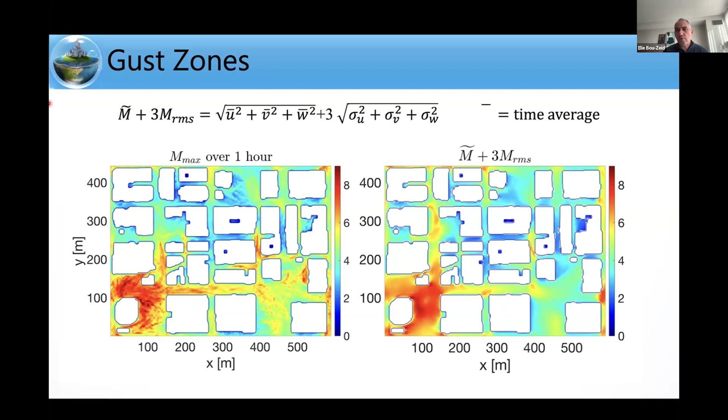So we were happy with this statistic. Of course, the 3 could be 2 or 4, it doesn't matter, and there are other statistics, but this one we were happy with. The other thing we wanted to analyze are stagnation zones, zones where the wind is very weak.

So after testing different statistics, the one we ended up with is the same one we used for gusts. Except for gusts, we were looking at regions where M plus 3 MRMS were large - here, the red area where this statistic is very large. For stagnation zones, you can simply do the opposite: look at zones where this statistic is actually very small.

What this statistic tells you, if it's very small, is that both the mean wind that can advect pollutants or heat from the location is very small, and simultaneously there is not a lot of turbulence to ventilate this location. So the location is not going to be ventilated by the mean wind or by the turbulence, and so it is indeed a stagnation zone. You can observe, for example, that this stagnation zone indeed has a low exchange velocity.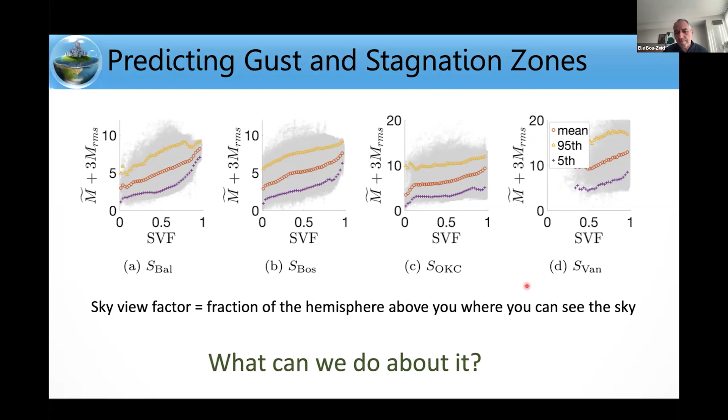So what can you do about it if you find a stagnation zone? I know I'm over time, so I'm going to try to wrap it up quickly.

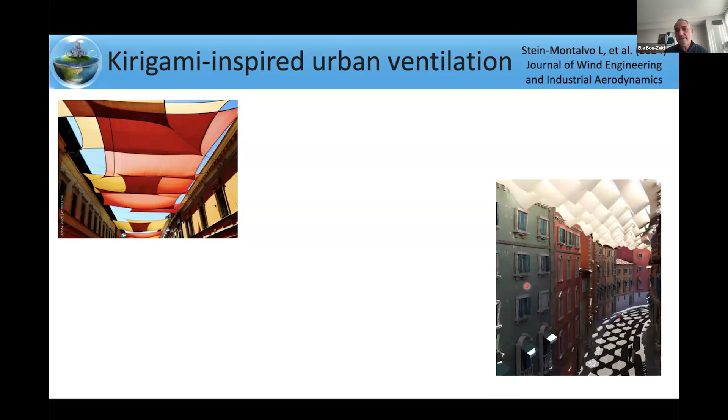Typically in Mediterranean streets, for example, they use shade fabric to shade pedestrians from extreme heat. What we were interested in is a solution that mixes both shading and ventilation. So in this case, we're going to use kirigami, the Japanese art of cutting paper. If you have fabric cut in a certain pattern and then pull it, it opens up in this pattern you can see here as a mesh, and this can offer shading and also maybe improve ventilation.

So the question is, how can it improve ventilation? We're going to do some LES simulations. I'm showing you, for example, if you simulate louvers with zero louvers, it's basically just an open street without anything on top. If you have 2, 3, or 5 louvers, the air exchange rate compared to no louvers at the top increases significantly. So indeed, with simple louvers, not kirigami yet, you can actually improve the ventilation of a street canyon.

I'm also showing that PIV results and LES are not too far from each other. Then what you can do with this is ask, instead of louvers, if I use kirigami, what would be the ventilation? Indeed, the kirigami works as well as the louvers—you see that the kirigami, at the same effective number of louvers, falls on the line of the louvers, so it's almost as effective. Finally, you can try to scale the ventilation that you get.

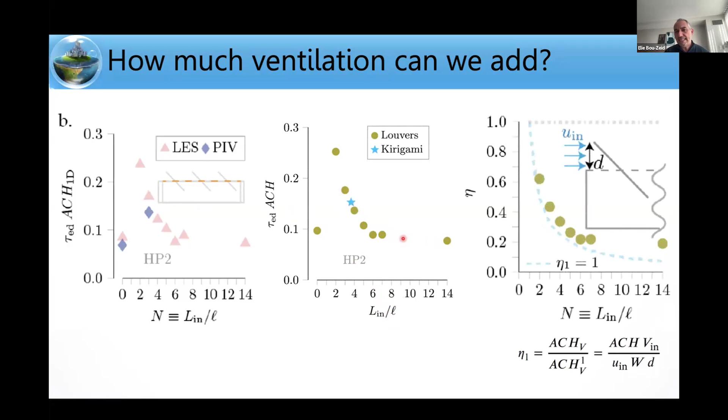I'm going to skip through this quickly. The nice thing about this project is it can be built in the real world. Lucia, the postdoc who did this, is building—or has built—a real world model of this that's going to be displayed in the Venice Biennale. So if you happen to be in Venice, let me know, and I'm happy to send you the details of where you can go see this, starting in June.

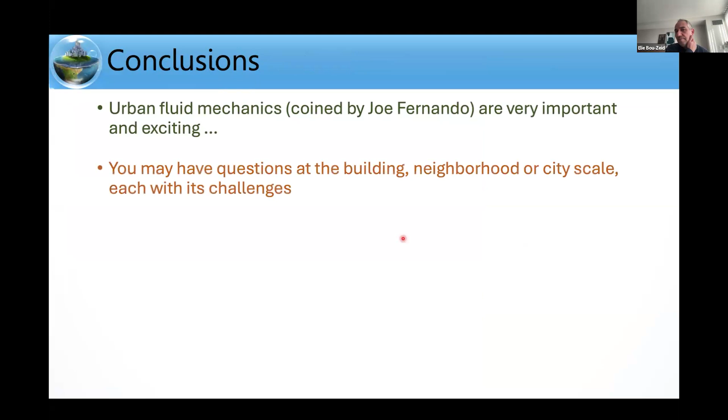To summarize, urban fluid mechanics, a term coined by Joe Fernando from Notre Dame, is very important and exciting. You can look at it at the building, neighborhood, or city scale, and each comes with its own challenges. At the neighborhood scale, something we've been very interested in is stagnation and gust zones, and identifying them based simply on topological metrics. At the same time, we need to think of solutions that enhance shading and ventilation for cities.

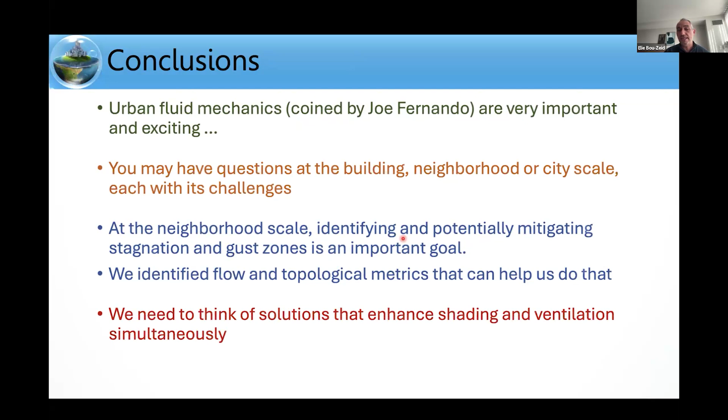And with that, I'll just end with a thank you for the students and postdoc who did a lot of the real work for this. More information is available at the link. Also a thank you for the Army Research Office and NSF, federal agencies that have been funding this work, and without them, this work would not be possible. Unfortunately, today going forward, that model of federal funding is really being challenged, but hopefully it will survive for the sake of science.

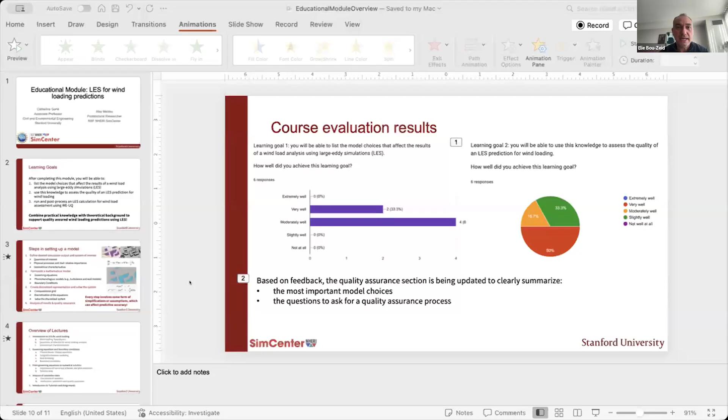So maybe I'll just quickly, and I can, because we're running a little bit late, but I can be very quick on the educational module side. Just need to find the right screen share. Okay, here we go. Oh, my screen sharing is paused, it says, so I'm guessing. Sorry, maybe I didn't, did I add share? Yeah, I think I had the power to undo that. So, do you see my screen now?

Okay, good. So I'll try to do this in 5 minutes. We have 10 minutes for more questions and discussion, but we quickly wanted to introduce this. We've been working on this for a while, and it's almost finished now and will be published online in the next week or two.

So we've developed this educational module for large eddy simulations for wind loading predictions. I took care of developing some lecture materials, so slides, and then there will be recordings of those lectures as well, while Abiy, a postdoctoral researcher at the SimCenter, took care of tutorials and also an assignment that comes with this educational module.

So the learning goals of the module are that students will be able to list model choices that affect the results of a wind load analysis using large eddy simulations, that they can use that knowledge to assess the quality of an LES prediction for wind loading, and that they can run and post-process an LES calculation for wind load assessment themselves.

And throughout the lectures, we really try to combine practical knowledge with a relatively thorough theoretical background, so that we can really make sure that people who have taken this class understand what it means to do a quality assured wind loading prediction using large eddy simulations.

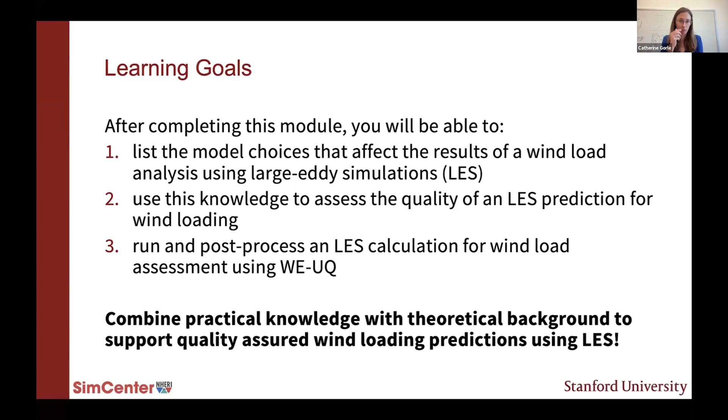So the way this is built up really follows the steps you have in setting up a computational model for wind loading prediction. We start by defining the desired simulation output, which could be peak loads on a cladding panel, but could also be overall shear forces or moments. And then the system of interest: is it a single building? Are you reproducing a wind tunnel test? Or do you want to reproduce a more realistic configuration of a building in an urban environment?

Thinking about the physical processes that play a role, when we think about wind loading, most of the time that is really just turbulence, and we think about neutral conditions. And then the geometrical characterization of the problem.

Then in step 2, you have to formulate a mathematical model, so you define your governing equations. We briefly cover the Navier-Stokes equations, but then also the subgrid models and wall models that you need because of the filtering operation and the limitations in terms of near wall mesh resolution. And then we introduce the boundary conditions as well, with a special emphasis on the inlet boundary conditions because the modeling of the wind is very important in this setup.

Once you have your mathematical model in the continuous sense, as a system of PDEs, you have to discretize it and solve the system. So we talk about creating a computational grid, the discretization of the equations, and then solving the discretized system and what is important in these steps.

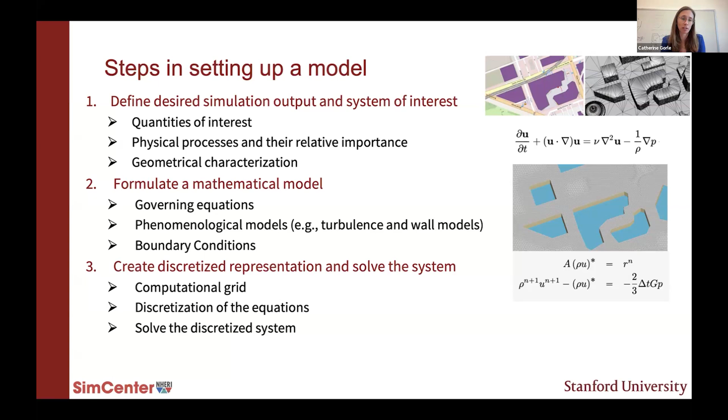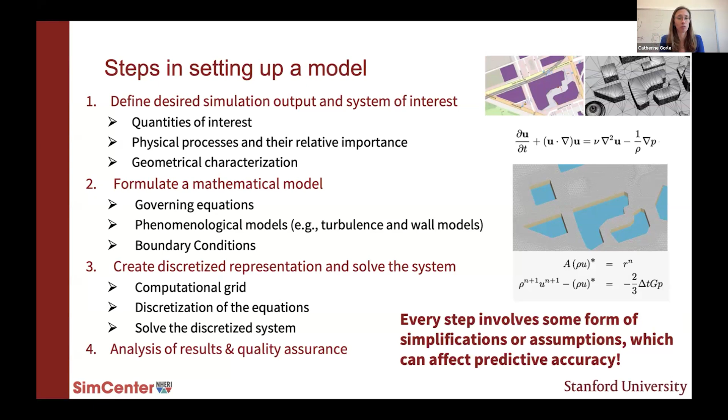And then in the last step, we talk about analysis of the results and quality assurance. In each of these steps, you have simplifications and assumptions that can affect predictive accuracy, and we really try to emphasize those to get to the idea that people will be able to do a quality assured simulation. The lecture overview really follows that outline. So we do an introduction to LES for wind loading to think about the flow physics and quantities of interest.

Then we introduce the governing equations, including subgrid models, wall models, and boundary conditions. We talk about how you go from these equations to a numerical solution. And then we talk about analysis of the simulation data. And then lastly, there is the introduction to tutorials and assignments.

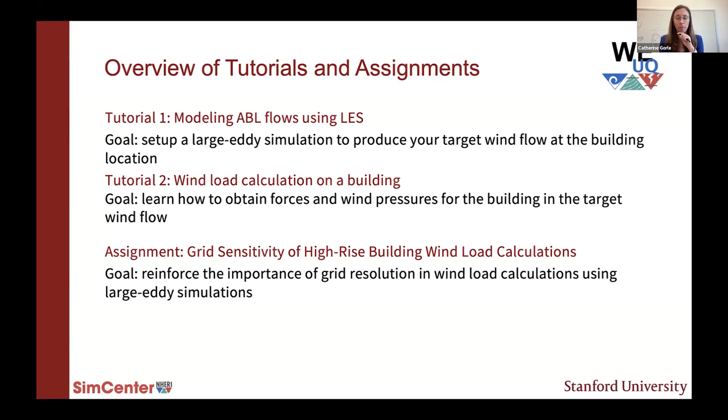We have two tutorials. One is modeling ABL flows using LES. There you work through setting up a large eddy simulation that will produce a target wind flow at the building location. In the second tutorial, you actually calculate the wind loads on a building in that target wind flow. The related assignment is for students to look at grid sensitivity of high-rise building wind load calculation, to reinforce the importance of grid resolution in the simulations.

The learning objectives I went through before. The tutorials and the assignment use the WeUQ tool, and then we will make the slides available so people can borrow from the slides, use them in their classes, teach them themselves. We will also make the lecture videos available so you can just make students watch them. And all the tutorial materials, videos, and assignments will also be available for download.

I tried two things before we finalized this. The first one was at an undergraduate level in one of our sustainable architecture and engineering design studios. Here we tested the lectures only, not the WeUQ tutorials, because they weren't focused on wind loading. The students were very enthusiastic about learning about wind, but when we really got to the equations, you could feel that at least half of them were kind of disconnecting from the material. However, they were very excited about being able to run simulations and doing some flow analysis. So they are really interested in learning more about these topics.

Updates that I did after trying this was to integrate more visualization to try and use that to improve conceptual uptake of the information. Moving forward, but not right now, I might explore an undergraduate specific version of this module. But for now, on the website we're going to say that the module is mostly for graduate classes.

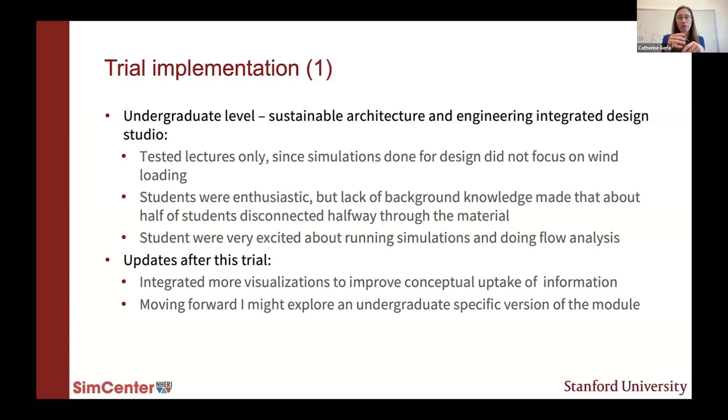So the second trial that we did was in a wind engineering graduate class taught by David Roueche at Auburn University. There we tested both the lectures and the tutorials. It was really nice to see the students being very engaged and enthusiastic, learning about computational wind engineering. The feedback from the instructor was very positive. He said that the module removes significant barriers to teaching students the basics of computational wind engineering and also really gets their hands-on simulations and run simulations.

And then we completed a course evaluation with a sample size of 6 students, but I won't really go through those results in the interest of time. I think in general, they said that they learned a lot. When we focused on specific learning goals, it indicated some things that we can improve, just in the delivery of the material and for the tutorials in terms of easing and streamlining some of the work there. And that's what we're working on right now before we will publish everything online.

So if you're interested in this, please reach out to us and we'll definitely let you know when things are available online, and there will be more communication from the SimCenter about that as well.